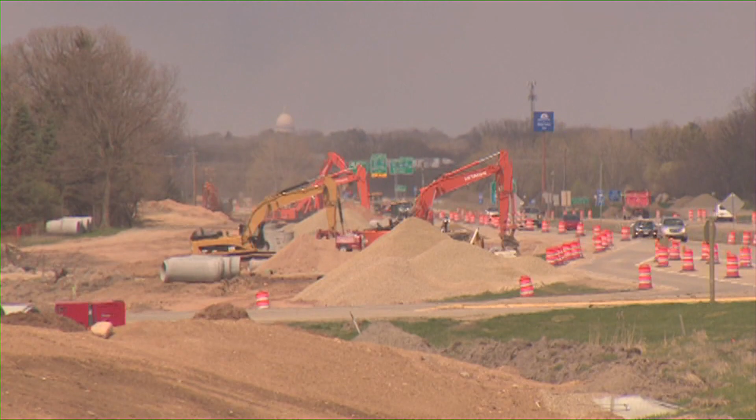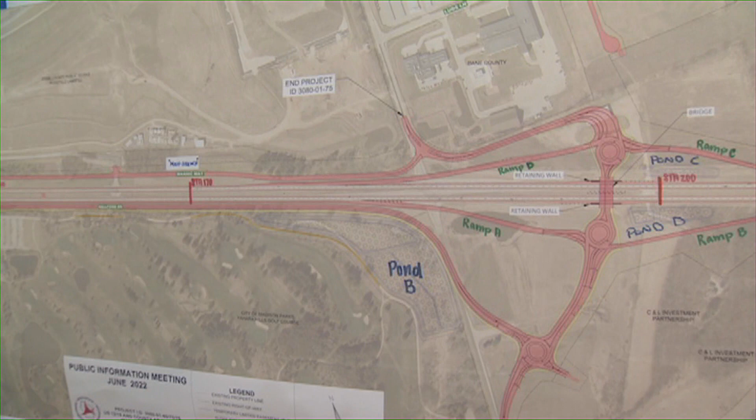Great to see you again, Craig. Welcome back to Building Wisconsin. It's been about a year since we last spoke. How are things at the DOT? Are we making any progress towards repairing our transportation system?

Well, it's great to see you, Stu, and thanks for having me back. And to answer your question, we are. Since 2019, we've fixed more than 5,800 miles of roads across the state and over 1,600 bridges. Now, we've got a lot more miles and a lot more bridges to fix, but that's a lot more than we were able to get in the decades prior to that.

And what you're talking about there is transportation infrastructure. To me, what that means is our highways, roads, and bridges. That's the lifeblood of our communities here in our state. They keep us connected, allow us to move efficiently and safely if they're constructed and maintained properly, right?

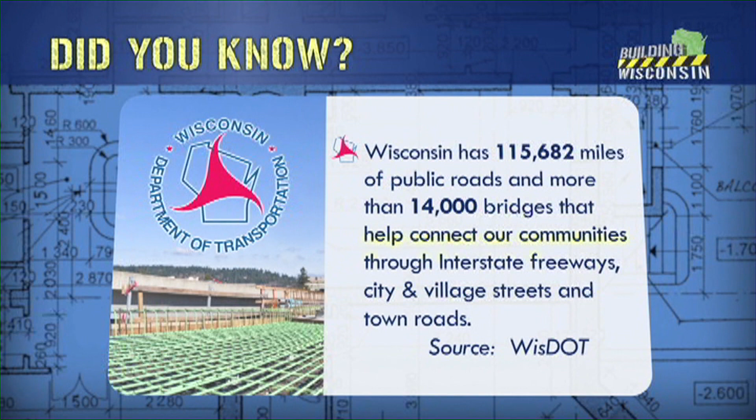That's absolutely right. How we engineer the roads has a lot to do with the safety, and I know safety is the most important for all of us. Across any area that we live in the state, safety is number one, whether it's getting our kids safe to school, getting home from work, whatever it might be. But it's also so vitally important for economic development in this state.

We're an agriculture, tourism, manufacturing state. Those are the three most economic dependent industries that you can have. And they're also three of the most transportation dependent to their bottom line. So the more that we can make this transportation network efficient for them, the better our economy will do.

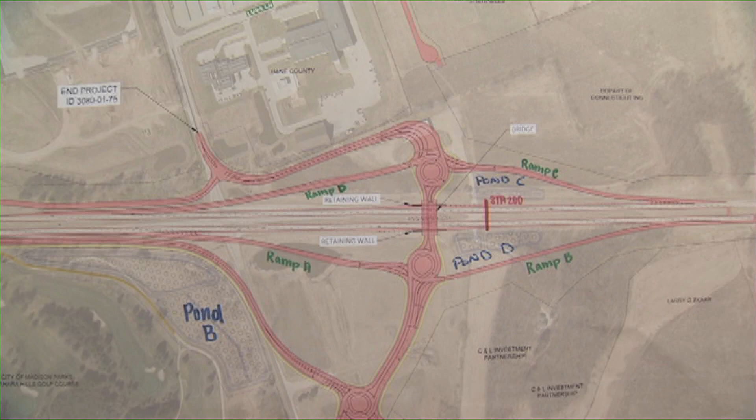Sure, and the project that we're going to visit on today's show with Terry McGowan is perfect. I looked at the DOT project overview and it talked about all different facets and why it's being done. Safety is at the forefront, but just look at it here. I mean, we're talking major interchange, a diamond interchange. We're talking about traffic circles, local roads, state roads, federal roads. There's a lot going on here.

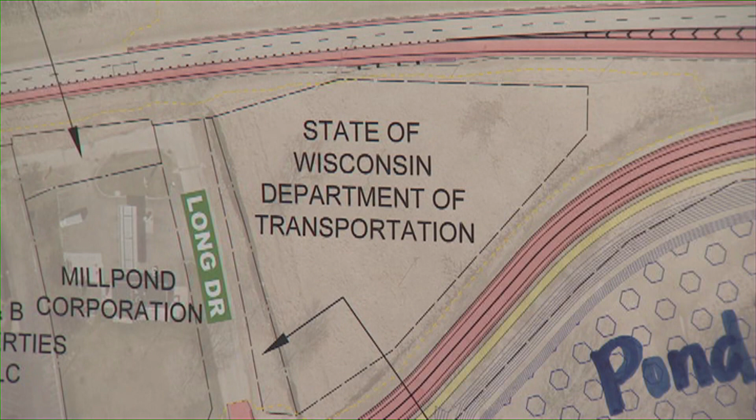You couldn't be more right. It involves the Federal Highway Administration, the state DOT, Dane County, Ho-Chunk Nation is nearby here. They've had input. So the coordination across all those levels of government - Federal Highway Administration, we have to put our plans and we have to get engineering approved. We have to get the environmental approved. We've got our state. All of those different levels have to be coordinated. We have to get those approved.

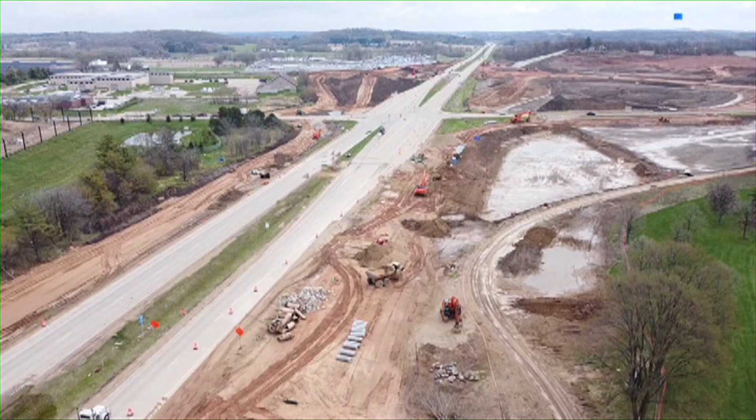We also go through public information meetings. Wherever the project is in the state, we invite the public in. They get to see the renderings of these. They get to have input as we're making decisions on how it's going to look. So it reflects what the people in the community really want.

Well, in addition to talking about transportation infrastructure, we're also talking about the need for ongoing sustainable funding at the state level, because I know there's a lot of federal money on the way from the last show we were on. There is. The president signed the Bipartisan Infrastructure Law a couple years back now, and we've started to see that money. That lasts for 5 years. We know the increased money we're going to get over the next 5 years here in Wisconsin, which is about a 25% increase in what we were getting, or about an additional $1.1 billion over those 5 years.

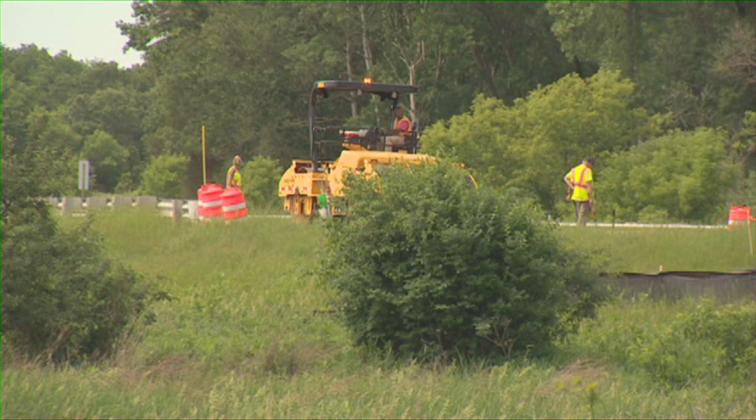And of that, we've been getting the vast majority out to our local units of government. About 70% of that money is going out to our cities, villages, towns, and counties. We've already got it out on over 500 local projects for the first couple of years of the funding. We know we've got 3 more years of that. We've got projects going on every town, every county in the state on their local roads.

But we've also got Interstate 41 between Appleton and Green Bay, for those of you that go to the Packer games and get to that narrowed area, that's going on. The Blatnik Bridge between Superior and Duluth is going to be a major project. We're still in the studying phase of that, but that's going to be a mammoth project going on up there. The North-South Corridor in La Crosse, which had been put off for literally 20 to 30 years, we're in the final stages of moving on.

And then just all of the town roads, those first mile, last mile roads that facilitate our agriculture and all of our local businesses. Oh wow, that's awesome.

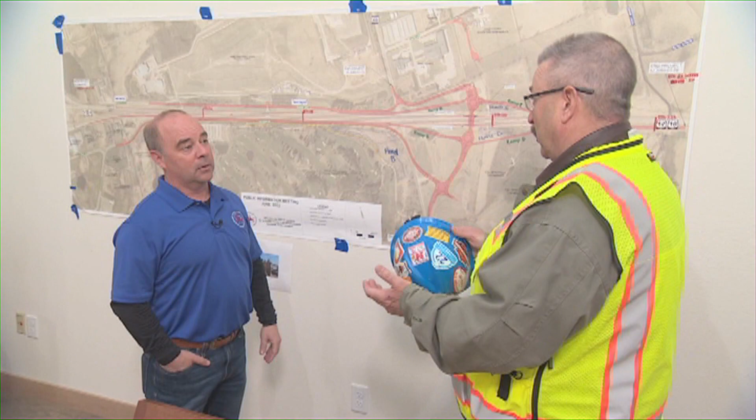I remember from our last show you said you have folks at the DOT willing and able to help with the process, because a local town board in rural Wisconsin might not understand, or might be leery of contacting the state for money. Is it still true you can help them? Absolutely, because for a lot of our smaller towns, villages, even counties, they're able to access some of this federal money for the first time, which is wonderful. But they don't all have an engineer on staff, they don't all have the capacity to interact with that federal money and the strings that go along with it. So we've been doing what we can to help them.

We've got a website right now, wisconsindot.gov/BIL, where we've got a lot of frequently asked questions, templates for them, and areas to help them. But we're also proposing in this state budget some actual dollars to bring on consultants who can go out and help them get their plans from concept to the point that they're ready to be built.

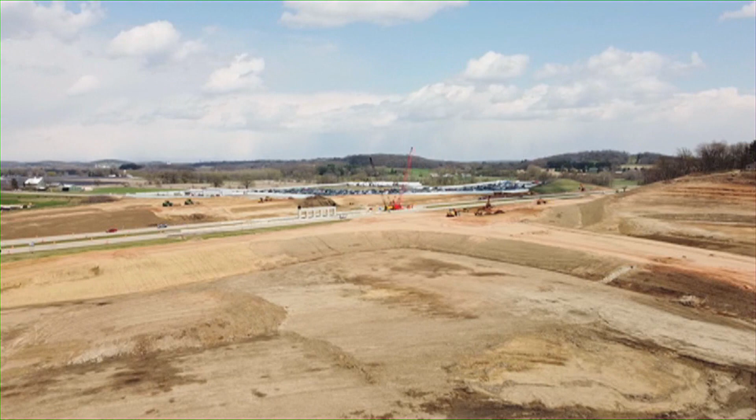Oh, that's awesome. And in the next budget, that's what we're talking about, ongoing sustainable state funding for these types of projects. That's great, we're getting that federal money, $1.1 billion—that's a heck of a lot of money. A viewer might look and say, $1.1 billion, why do we need to support it with more state funding on an ongoing basis? Well, first of all, even for the federal money that comes in, we have to have state matching dollars for a lot of those projects in the first place.

But whether it's at the state or federal level, we've gone more than a generation without this kind of an increase. So it is more money coming in, but we have deferred maintenance on these local roads, state highways, and interstates for a long time. So it's getting us back. We've finally gotten some increases, we've come to agreement with the governor and legislature over the last couple budgets. We've got a proposal in this budget to increase it again by taking sales tax dollars from electric vehicles that generally go into the general fund and put those into the transportation fund.

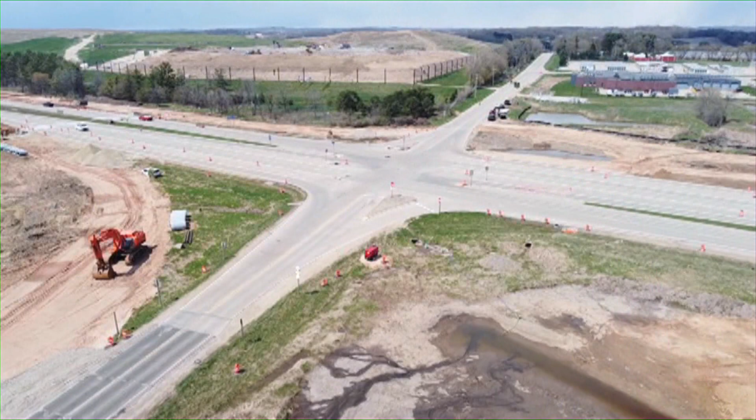But just because we've got a couple years of progress, that's not enough. It's got to be sustainable over time for projects like this that take 5-6 years just to get to this point. We've got those going on all over the state, and we need to keep this momentum going so people can plan in the most efficient way possible.

And that's probably the real reason we need it to be ongoing, sustainable at the state level, because the companies and individuals working on these projects need assurance these will be viable projects even if they don't start for 5 to 10 years down the road. That's absolutely right.

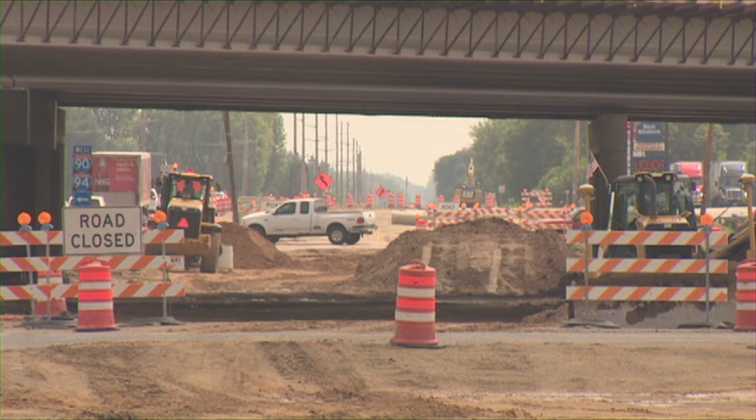If you're a county government planning the amount of roads you're going to do, you want to know for your workforce, for your equipment. If you're only going to get 2 years of increased funding and it goes back down again, you're not going to be able to make that decision. If you're in the private sector, a contractor, you need to know how many folks to bring on, what equipment to buy, and what the horizon is before investing significant money.

So if we have certainty where that federal funding is going to come from, we can spend those dollars a lot more efficiently than if we start and stop and have to start studies, stop studies, and do those things. The more certainty there is, the more efficient we can use the dollars.

And it comes back to what you initially said. This doesn't happen overnight, this has taken 5 or 10 years of planning. Absolutely, to actually get to this stage where they're actually moving dirt. That's absolutely right. Okay, are you optimistic about the future of transportation in our state?

I'm really optimistic. We've made more progress in the last 4 years than we had in the previous 20. We know there are great apprenticeship programs out there, we're going to have the workers to do it. We've got companies that know there's some level of stability for the next 5 years so they can get the equipment they need. We know we've got at least 3 more years of increased federal money coming in, and we've got another budget at the state level where we're looking at increasing the state share into transportation as well. So I believe we can continue to chip away at all these areas that have been neglected for decades.

Wow, it's great to finally get some good news out of state government, that's for sure. Really appreciate you coming on today's show. We'll catch up with you again in the future. Thanks for having me, Stu.

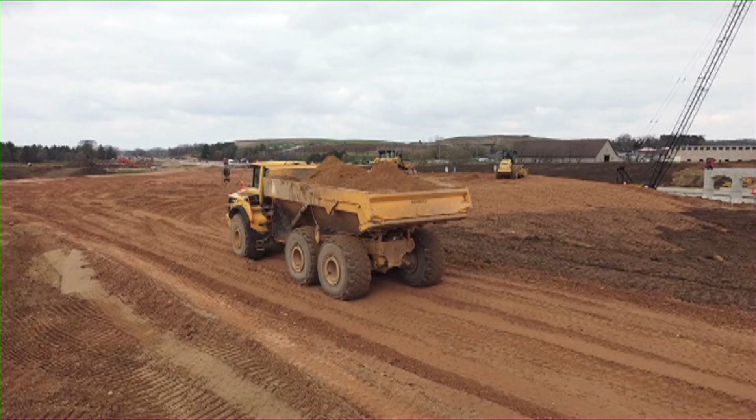I was just talking with Secretary Thompson about this particular project down near Madison, but it's really representative of many projects currently going on in the state, and looking into the future, there's a lot of projects. This one seemed to center around safety, didn't it?

It did, Stu. This is one of the projects that DOT has addressed on 12/18, where there's been a lot of fatalities. There are too many crossovers on this stretch, cars coming out in front of fast-moving traffic. And this is what the infrastructure improvements are all about, Stu - saving lives and preventing these fatalities. So we're out here right now doing everything we can to make our roadways safer.

And that is why we wanted to have you on today's show, because this is a perfect representation of what your members are working on. And when we talk about transportation infrastructure, that's what we're talking about in this show anyways - our highways, roads, and bridges and improving them.

And right there is that County Road AB that crosses 4 lanes that you just alluded to. And the viewers can look, I'm sure we've gone through many intersections like that around the state. They are dangerous, and it's great that the DOT's taking this on. I know, Stu, a lot of times we talk about moving commerce and keeping traffic jams out of the way, but we have to address this issue. Too many people, too many fatalities, too many accidents right here on AB and 12/18.

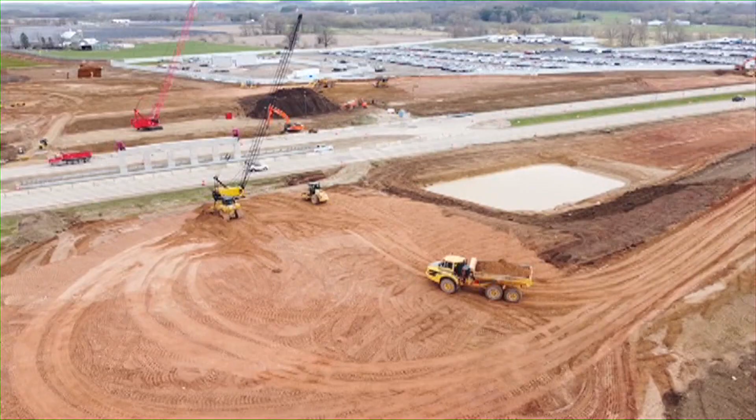Sure. Okay, so let's get into what your members are up to on a daily basis out here as this project's going on. Well today we're going to see earth movers, we're going to see cranes, we're going to see excavators out digging sewer trenches, and this is all going on at one time.

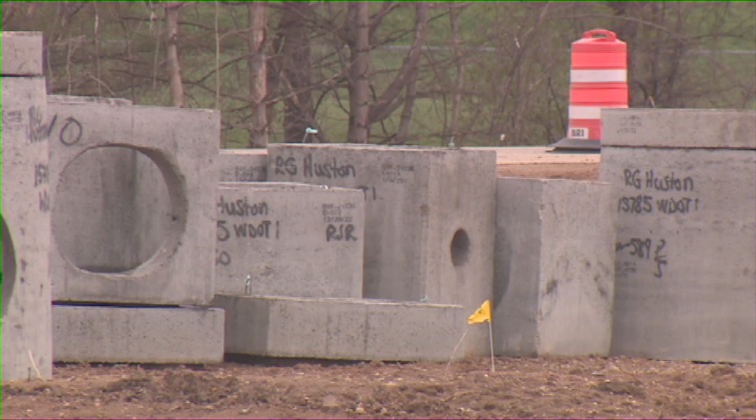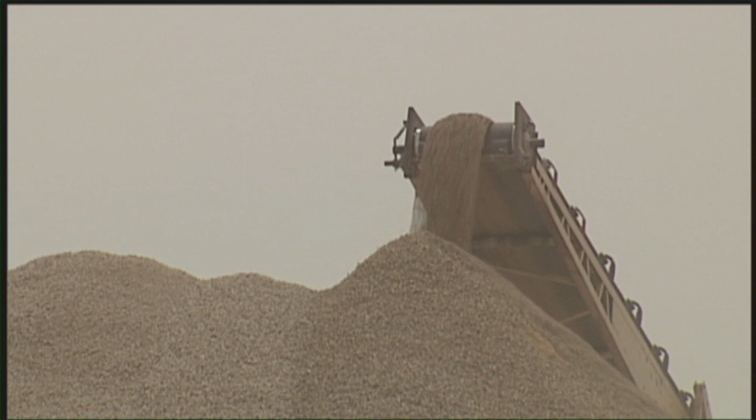And the unique part about that, Stu, is it's all being done by the same contractor, RG Huston. Oh, really? That is unique, isn't it? Because you have many signatory contractors, but usually there's more than one on a particular job site. Yeah, actually they came out, did the clearing and grubbing, they're doing the earthwork, doing the bridge work, doing the sewer and water, both sanitary and storm. Heck, Stu, they're even producing the aggregate and going to lay 190,000 tons of aggregate on this project. Wow, that is an enormous amount, and what a great story to share with everybody - one signatory contractor doing all the work here with your members.

You touched on storm sewer. I know in our last show we talked about how important the little things that are out of sight, out of mind are to road construction. Storm sewer is at the forefront because when it rains a lot, that water's got to go somewhere. That's right, Stu. Every installation we've talked about displacement of water, because a new road bed is not good if every time a deluge comes, that road bed's going to flood. That's why they've got all this new storm sewer going in - they're going to displace the water in a proper sequence.

There's going to be mitigation ponds on this project so that you're not traveling 5 miles with a storm sewer. Okay, gotcha. And so is that what's going on right down here on the south side of 12 and 18? That's what's going on. We got 4 crossings between the sanitary and the storm sewer.

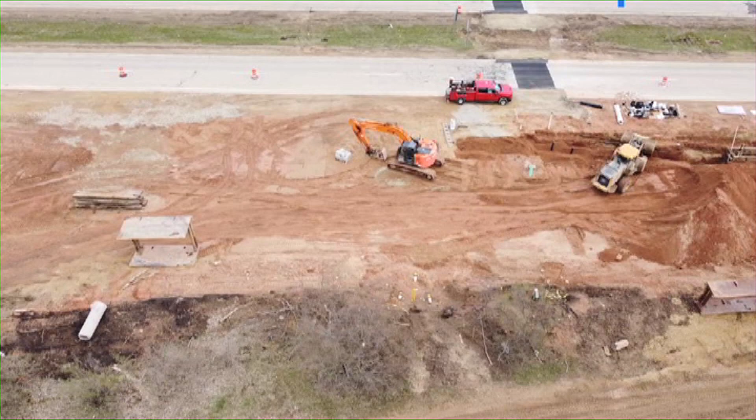They're going to have 4 open cuts. They're going to divert the traffic and do it with live traffic without shutting the road down, getting those pipes in and across the road. Boy, talk about safety of the utmost importance. They're working around live traffic doing those open cuts, not to mention the guys down in the open cuts. Yeah, amen to that, brother.

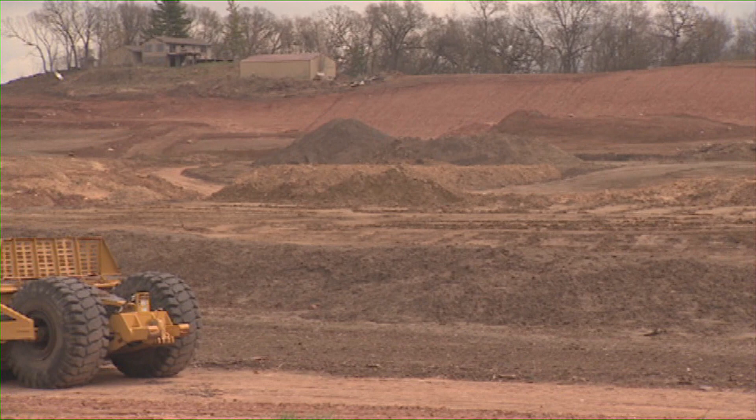So, down there's a lot of sewer and storm sewer work going on and some open cuts. I look down here to the south, it looks like a heck of a lot of dirt was moved. Yeah, there's a lot of dirt. There's actually 550,000 yards of dirt being moved on this project. A lot of what you see lined up over there is all the storm sewer and the basins. You'll also see some sanitary. The green pipe is going to be the sanitary that's going to move through.

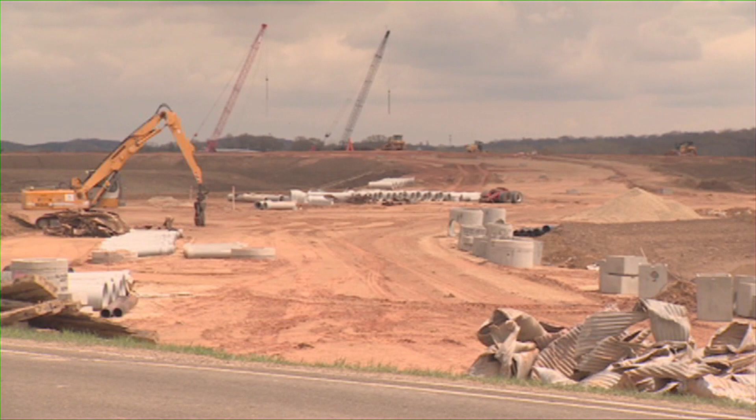It's an incredible transformation already from when I drove by here just a year ago. Craig said they started this in September. They're really making some good headway right now. I think a lot of that has to do with one contractor performing so much of that work themselves, because everybody learns to work as a team and in concert, and everybody is well trained.

Awesome. Well, let's head over here near the future overpass and see some of the equipment they're using. Okay.

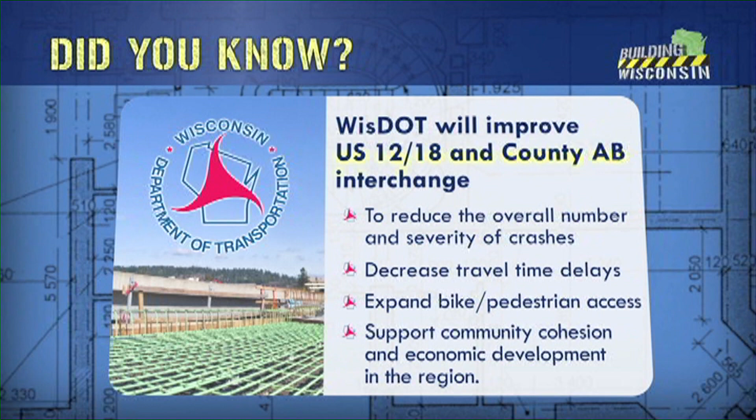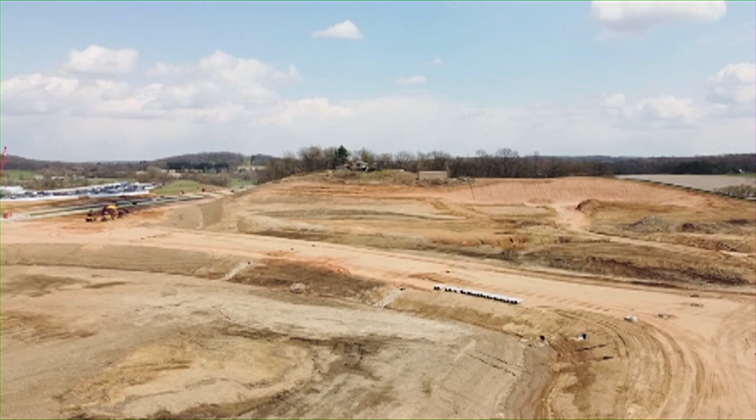Boy, looking around this portion, you can really see where all that dirt was moved. 550,000 yards, and you said it was moved. Where did it all go? Well, they balance it out, Stu. Some of it goes to the ramp, some of it goes to the bridge approach. Everything balances out, and that's how the plans are drawn and how they figure it out.

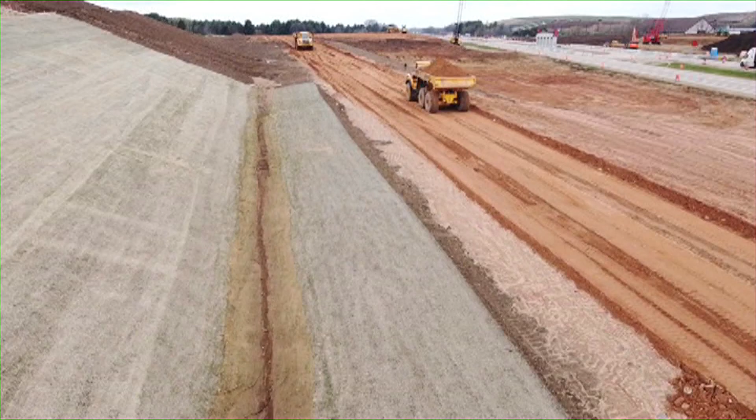Boy, it is awesome, and I love seeing the guys in action. Tell us a little bit about what I'm looking at here. This looks like it's an on-ramp to 12 and 18? Yeah, this eventually will be an on-ramp.

What they're doing down below is digging a mitigation pond. Now, a lot of that soil is coming out wet, so when it comes out wet, they're going to take it off to a dump site. If it's good engineered soil, they're going to bring it here on the ramp. They're going to push it off the bulldozer, and compact it with what we call a sheep's foot drum compactor.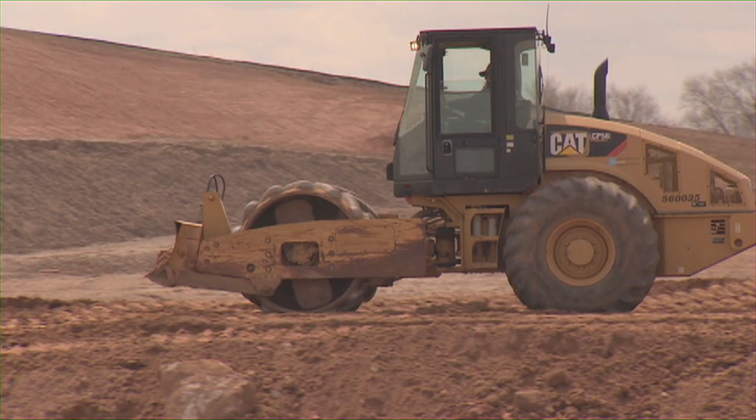I've always wondered why there's these knobs on that particular style of compactor. Well, they're designed, Stu, for chunks of clay to break up the soils so they get better compaction. You can't get compaction if everything's coming in as a clump. Oh, so it breaks it up and compacts it properly. That's right.

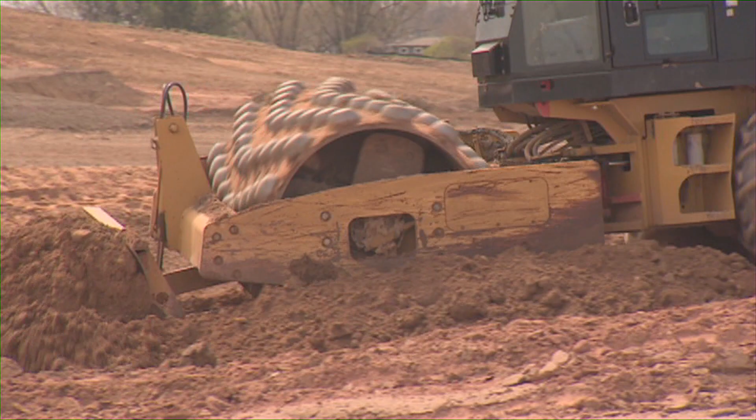If there weren't clay and big chunks, you might see a smooth roller. Yeah, if we were in sand country, you'd see a smooth roller, or you'd see an 824, 814, which is a large rubber-tired dozer. Sure, and I can see that.

You said they take that wet soil and dump it over at a dump pile. Is that so it drains out and then they can use it once it's dry? It drains out, or they're just using it for a fill area. A lot of times it's kind of a risk if you try to wait for it to dry out and then bring it back into where you need engineered soil.

Okay, how many members are working on this site? Right now we got 20 members, Stu, and we have 4 apprentices working here as well. Wow, that's awesome that this contractor elects to have apprentices on here, because really that's the future of the industry.

Tell me a little bit about that contractor. Well, RG Huston started out as pretty much a highway landscaping company. Years ago, they were partnering with somebody else, and they continued to work hard.

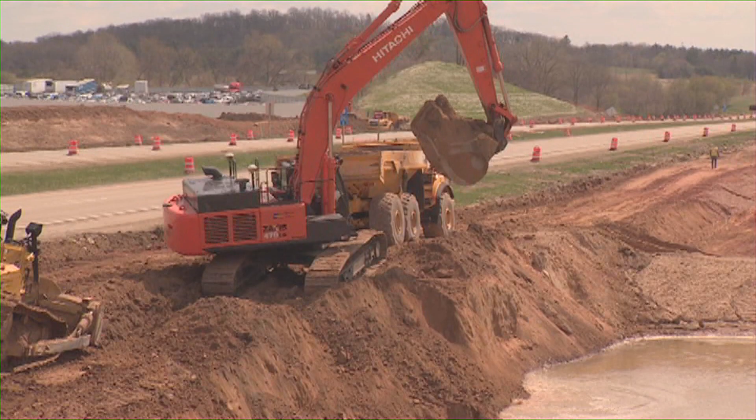They worked their way up in the highway industry, and now they're a major general contractor. As you can see, they general contract mostly to themselves on this project because they're self-performing so much of this work themselves, which is really unique.

It's not unlike a lot of your contractors we've talked about in the past, how as they grow, you can help them grow because you're providing that highly skilled, highly trained workforce to help them along the way. Absolutely. As far as certifications, training, and supplying apprentices go, we're there, and we're partnering with RG Huston.

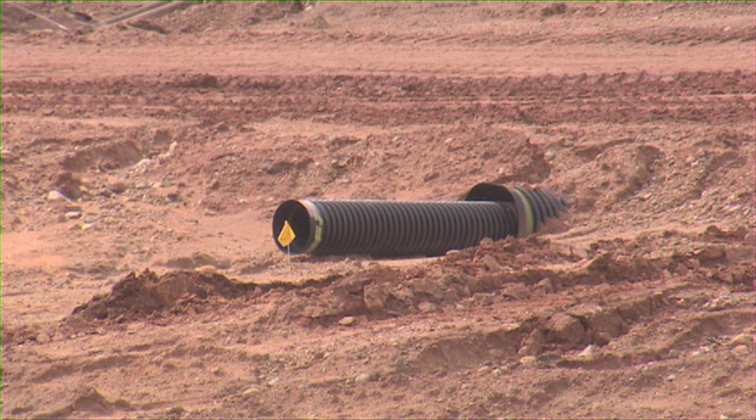Oh, and here's the mitigation pond you were talking about. As I look to the south, I see there's a drain pipe, and you can see it's already dumping water into this. So a pond like this isn't just for the end result, it helps during the construction process.

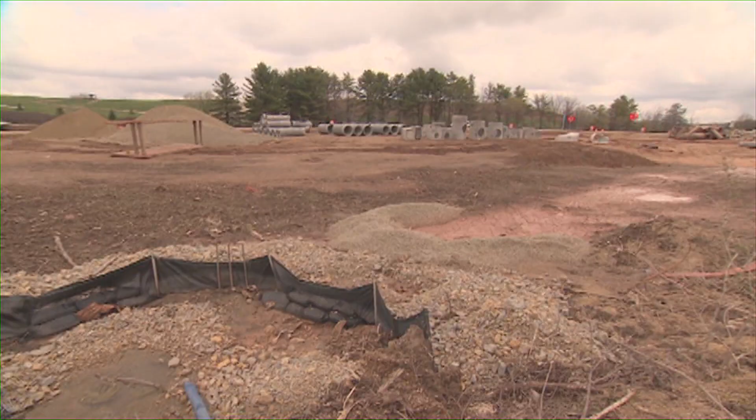It does. There was actually a massive dewatering project going on this site, also done by RG Huston themselves. That tells you there's a high groundwater level and an accumulation of water in the area. Four retention ponds on this project, Stu. Wow, again, water management is crucial to the success of our highway, road, and bridges projects.

Yeah, so down here, what's the equipment doing? I see a dozer. Yeah, we've got a dozer doing the embankment for the pond, and we have the excavator. Watch that excavator, it'll choose whether to take the dry fill and dump it over on the ramp to compact it as part of the embankment, or take the wet fill down toward the water line and send that off to the dump.

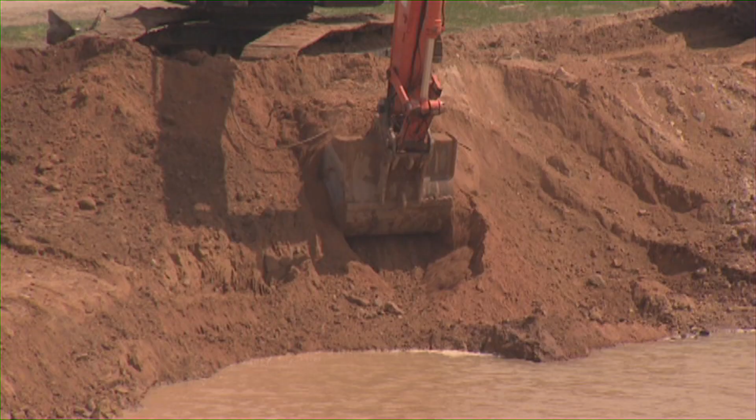Look at that, how he's feathering right along there, careful not to get the bucket or the teeth into the water, I suppose to keep the dry stuff segregated from the wet. And as I look at that dozer working on the slope, I'm always worried it's going to flip in, but there's never a worry with these guys running it. He knows what he's doing down there.

They certainly know how to bank a pond like this without putting her in the drink. That's a good thing, that's for sure.

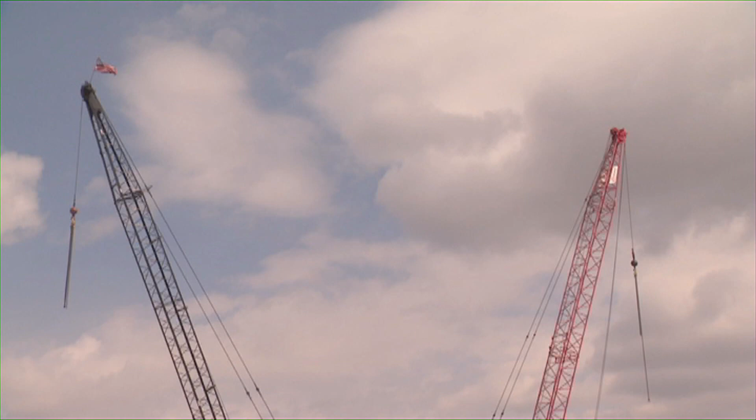Okay, let's move on to the eye candy, as I call it. Those beautiful cranes, how are those going to be used? Well, so far those cranes have been used to drive piling and to pour these piers you'll see out in the middle. That's going to be the center of the bridge.

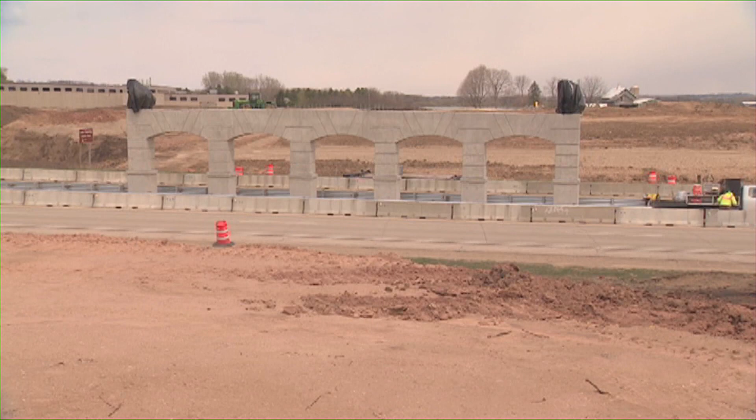Now what's going to happen tonight is they're going to walk each crane on either side of this road, and they're going to build the abutments, and then set the beams for the bridge. So those cranes will be pretty much stationary for the remainder of the project once they're in place. Correct. So that's going to be quite an operation too.

This bridge is going to be part of the safety. This bridge is going to bring cross traffic across 1218 without contending with the oncoming traffic.

That is great. And as I look at all these highly skilled professionals operating the equipment, I can't help but marvel at the training they get up at Coloma to make it all possible. That's right, Stu. We put a lot of money toward training at our school in Coloma. The apprentices, the journey workers, everybody gets their certifications for MSHA, OSHA.

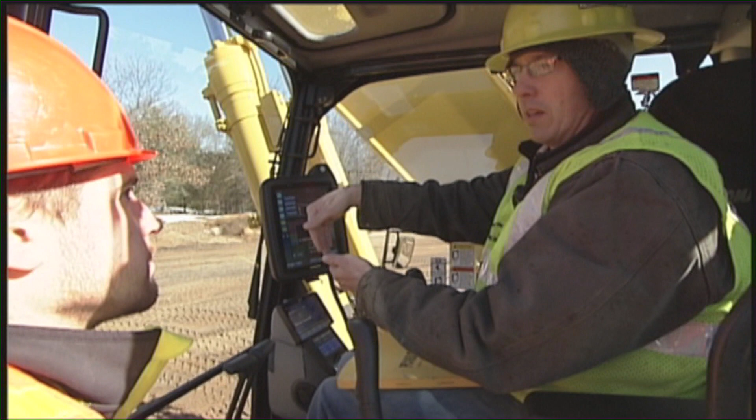They also get upgraded on much of the technology evolving in our industry. A lot of the equipment you see right now has onboard computers, and these onboard computers get more and more advanced as the years go by. So we upgrade our operating engineers so they understand the technology, where it's going, and how it functions.

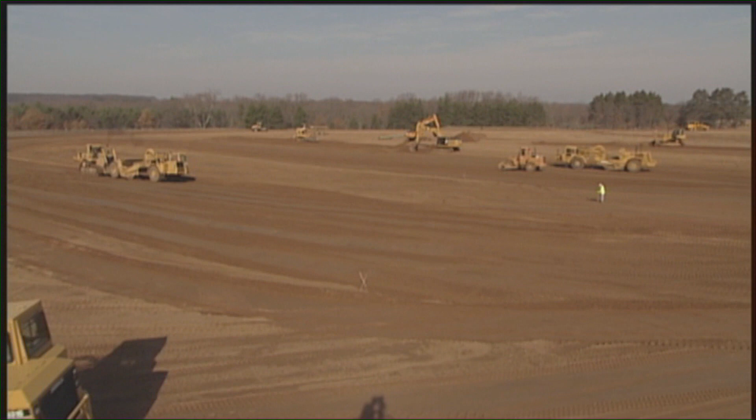I love going up and visiting Coloma, especially out on the field aspect of it, because you'd be hard pressed to know it's not a DOT project, and that's the training. You mentioned the bridge abutments, the pilings going down, the water and sewer work, everything gets trained at Coloma. If you drive through Coloma, another thing you'll see are the roundabouts.

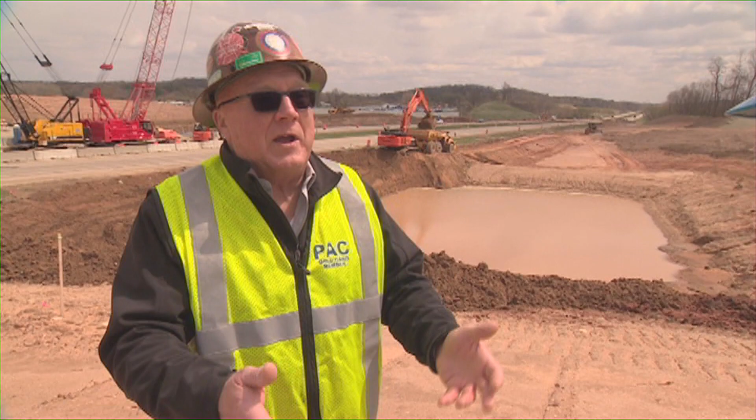We are building DOT spec roundabouts up there with plans that Wisconsin DOT actually supplies us with, so that when our students come out here, they know exactly what they're doing, they know exactly what DOT wants, and they produce it. That's awesome to hear.

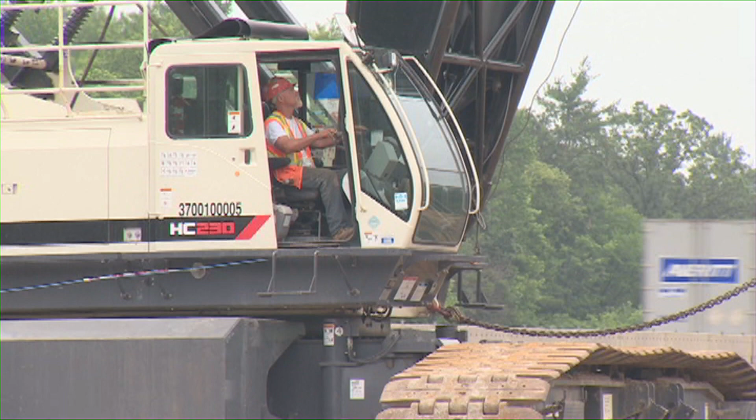Now, like all the trades, the workforce is aging. Talking to Craig, there's so many projects on the horizon. Have you given thought to that? How are you going to replace these professionals with the next generation? What are you doing to supply the workforce in the future?

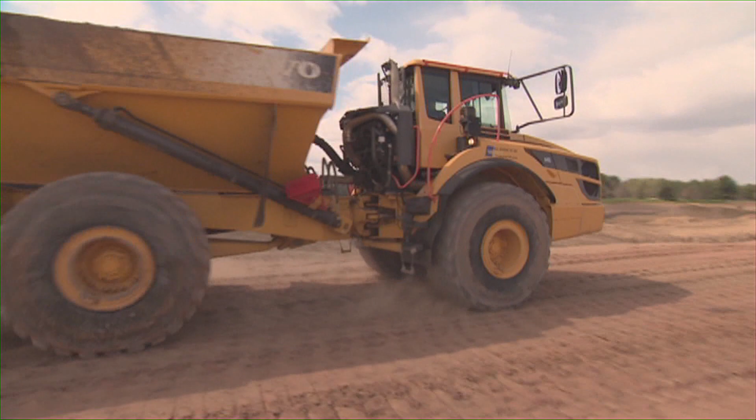You know, Stu, it's funny you ask. For the past 10 years, we've been preparing for a boom. For some reason, we had this feeling it was coming. Our Destinations Career Academy is reaching out to high school students to let them know the work is going to be there. If you want to work with your hands, we have the opportunities for you. So our recruiting is paying off right now. After 10 years of doing this, so far we're able to meet the needs.

Right now we have 900 apprentices in our program, Stu. We are looking at a possibility of 1,200 students in our apprenticeship program, just to meet the needs of the Infrastructure Investment and Jobs Act. Wow, that is awesome to hear.

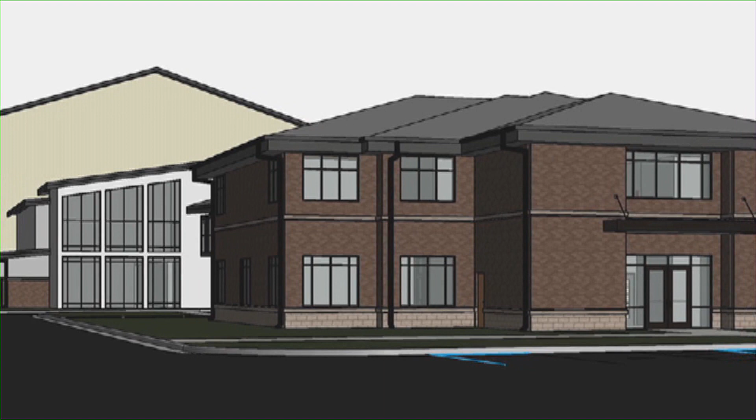And your members have the foresight that, as we mentioned last time, you guys are adding a $20 million addition. How's that coming along? That's right, Stu, and it's coming along just wonderful. We have to be able to accommodate all the new apprentices coming into our program. Last training season, unfortunately, we had to turn some students down because we simply didn't have the classroom space. Oh my gosh. Next year we will, and it's expanded exponentially, and it's something to see.

And best of all, there's no tax dollars in that. That's all member funded, right? That is our members paying for that project. Our members investing in the future of this program. Our members investing in this industry.

Terry, it's awesome to have you out on today's show. It's always great to get out to a job site, and it's even more fun when we get up to Coloma. Maybe we can do that in our next show. Yeah, let's do that. I like having you up there.

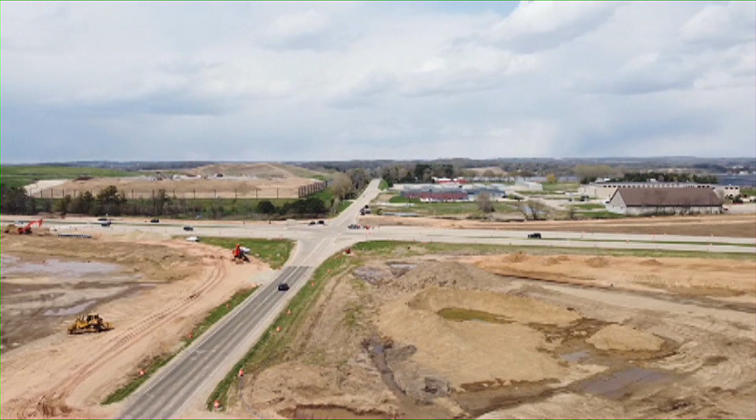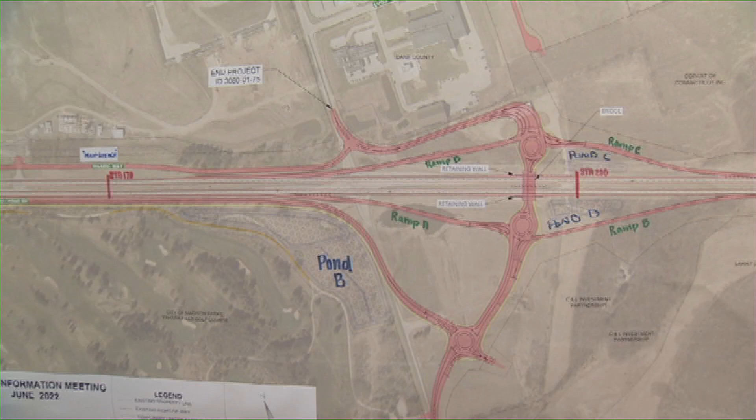Welcome to Building Wisconsin, Mark. Great to have you on today's show. So far we've been talking with Secretary Thompson from the Wisconsin DOT about transportation infrastructure and the need for ongoing funding for projects like this for highways, roads, and bridges. We also spoke with Terry McGowan from Operating Engineers 139, and he showed us what his guys were up to on this project and how they're prepared to provide a highly skilled, highly trained workforce for us in the state, so we don't have to worry about these future projects and not having the skilled workforce to do it. We wanted to finish up today's show with you to learn how things are moving on a local level. So let's begin with who you work with and what your role is.

Well, first off, let me say, Secretary Thompson, Terry McGowan, I'm glad you had those two gentlemen on earlier today. Two great builders of this state and two people that see the future, and the future is very bright for Wisconsin. I'm Mark O'Connell of the Wisconsin Counties Association. I represent county government at the state and federal level. We try to get done whatever it is counties want to get done. And one of the things we want to get done is building our infrastructure to connect our citizens and position our state for future success.

And that's perfect to have you on today's show, because I firmly believe that our transportation infrastructure is the lifeblood of our small communities that make Wisconsin special. Oh, it's absolutely. I mean, this project right here, we're going from Madison to Cambridge, a small community in Dane County, but there are communities all over this state that are connected to other areas. Peshtigo, Marinette, Cassville, Brule, all over this state, and there's construction going on. But what that really says, when you see construction going on, that's success. That is laying the brickwork for a very bright future.

Those small communities are really the fabric of who we are, and transportation infrastructure is the thread that connects us. We can't go 20 or 30 miles in this state without seeing some small community where people are raising families, working hard, and trying to be a success. That's unlike our neighbor Minnesota, a great state, but you can go an hour without seeing a small community. Here, the small communities are the lifeblood, and for them to be successful, they need to be connected with infrastructure.

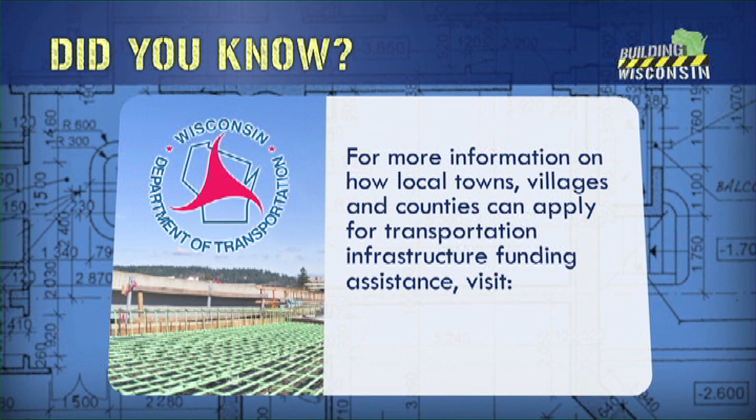So there's no reason for a township not to say, hey, we need this bridge fixed, we need this road repaired, maybe there's some state or federal dollars there—let's contact the state, and they're willing to help us see if we can get some of that funding. I've been in government for over 30 years, and it's hard to recall a time, maybe during the Tommy Thompson years, where we've had more resources available to us than today.

So at the end of the day, it seems transportation infrastructure investment will lead to strong local economies, which ultimately makes living anywhere in Wisconsin a great place to live. Well, we have a big public sector in this state, but if we're going to succeed, our private sector has to do really well. So we need to ask ourselves in government, what does the private sector need to be successful? Money to invest and build and grow, smart young talent—the number one resource for private sector profit in the future—but probably most importantly, soft and hard infrastructure.

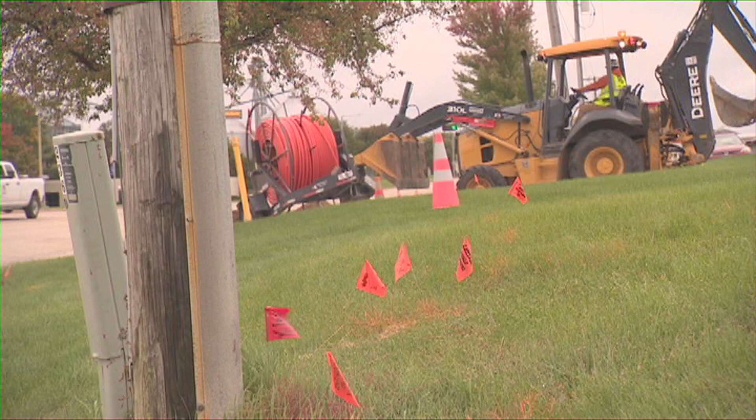Soft infrastructure like broadband everywhere you can breathe, and hard infrastructure to move people and product from where we are to where they need to be. Transportation infrastructure is absolutely critical to future success. There's no guarantee that good transportation infrastructure alone brings economic success, but without it, that's a guarantee we are not going to be successful. Fortunately, in this state, we see the future is bright, and we're building our way to that great future.